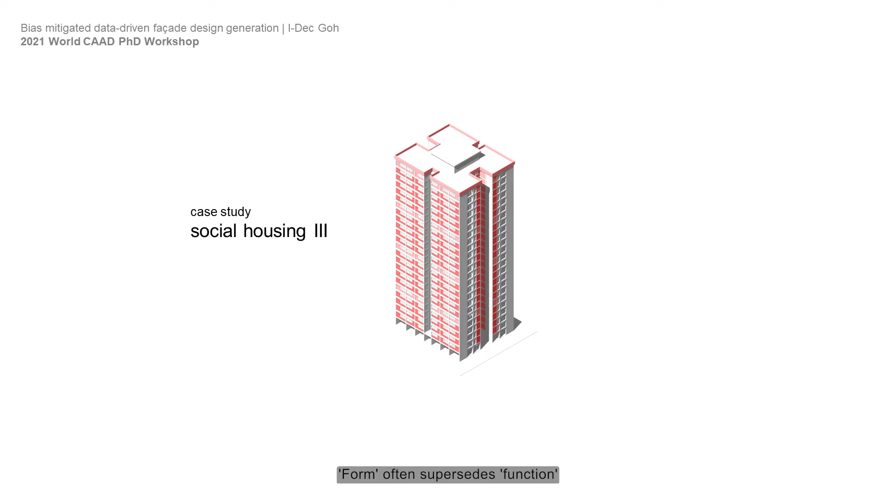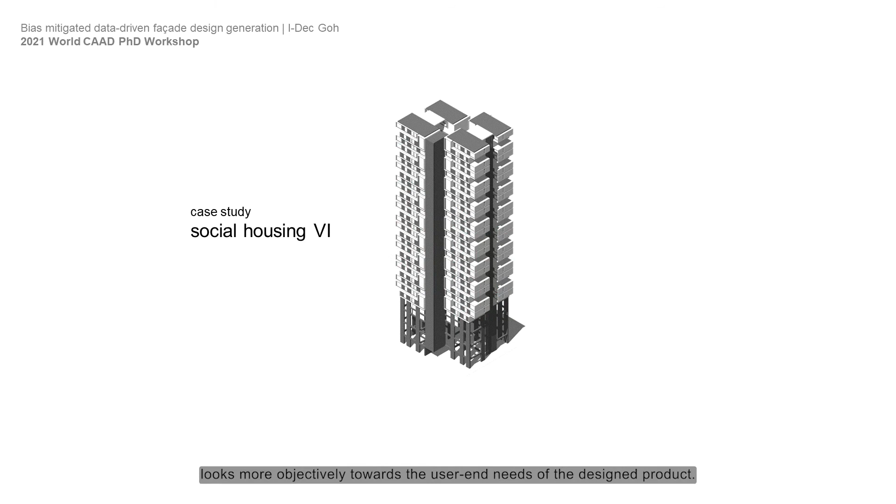Even in present architecture, the age-old theoretical argument of form and function is hard to avoid. Form often supersedes function to enhance marketability in architectural design. Form is closely linked to subjectivity based on producer outset bias, while function looks more objectively towards the user-end needs of the designed product.

Unfortunately, this oversight of producer-user design hierarchy in high-rise housing is evident in Singapore. The design preference in a building's form to its functionality is apparent in existing social housings that adopt architectural styles unsuitable for warm and humid climates. Hence, the functional solar needs of the occupants are often not well considered when prioritizing aesthetics, such as the abundant use of facade glass as opposed to heat-preventive materials.

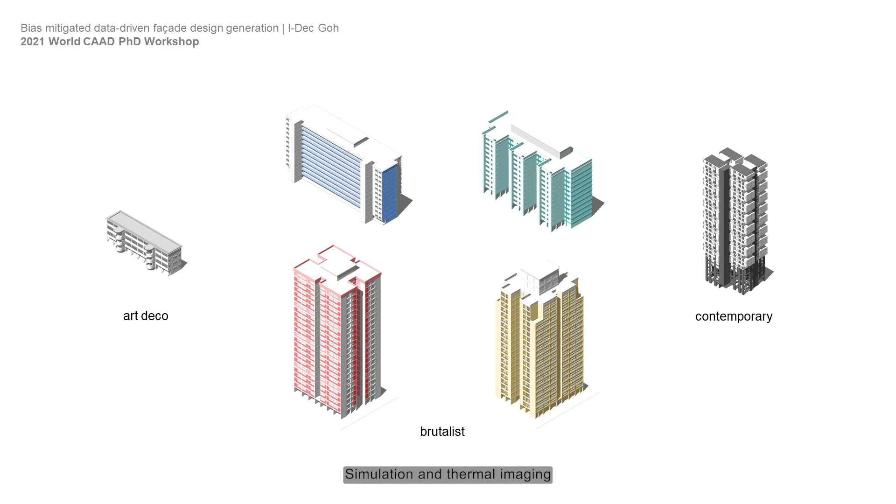Simulation and thermal imaging will be taken from 6 existing social housings in Singapore, selected based on 3 prominent architectural styles since its development in the 1960s. These are Art Deco, Brutalist, and Contemporary.

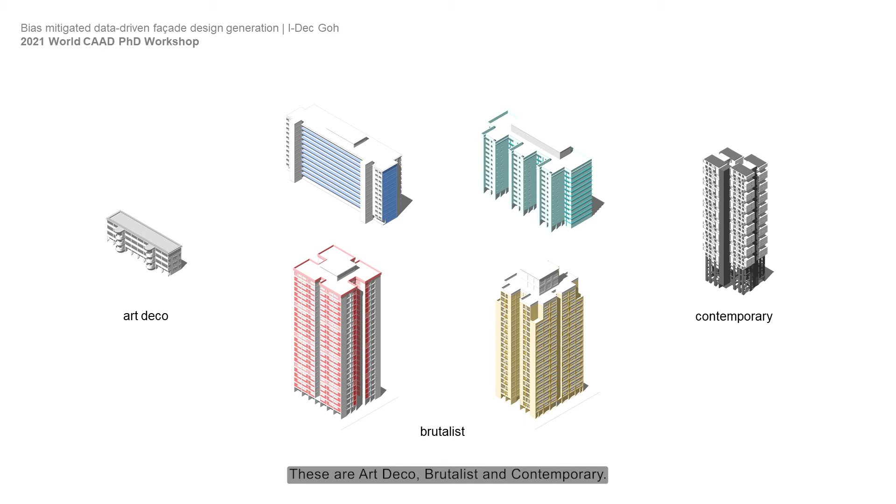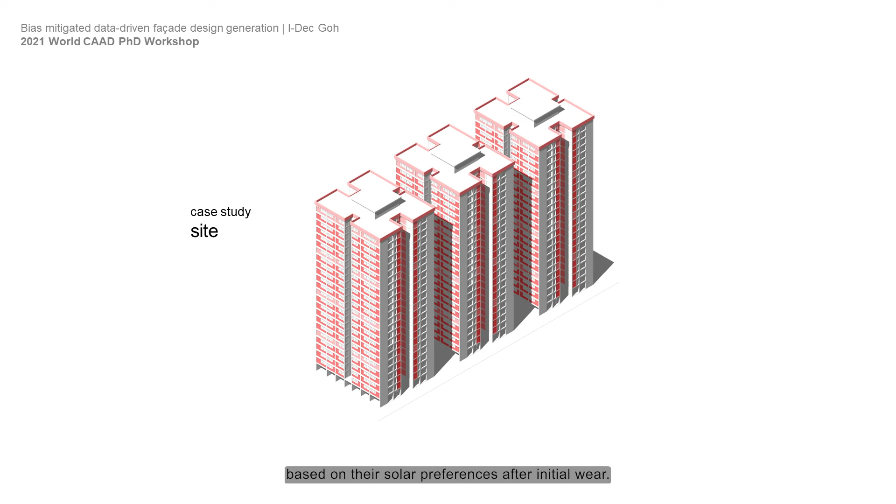Analysis of chronologically maturing buildings will account for design aesthetic and stylistic changes over 2 decades and occupants' interventions based on their solar preferences after initial wear.

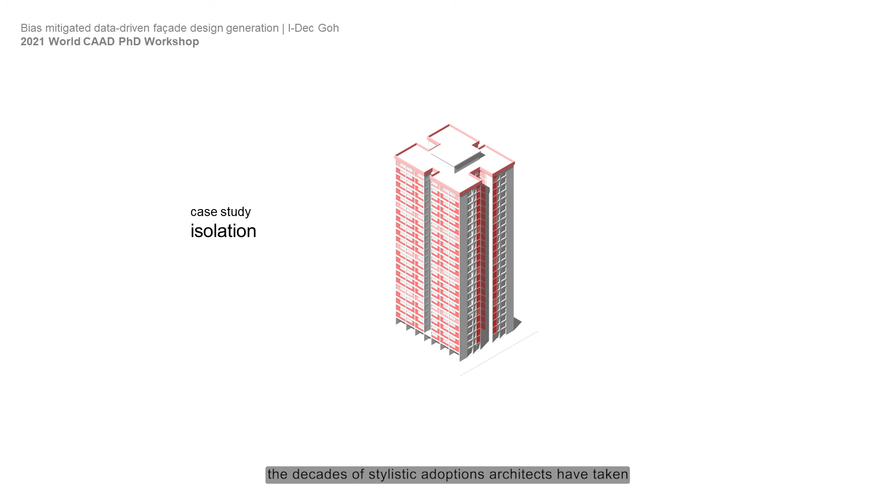Finally, conducting case studies of different architectural styles considers the decades of stylistic adoptions architects have taken to social housings in Singapore. Each building will be studied against the island's general climatic conditions over 3 months to collect incident solar radiation data over monsoon and non-monsoon seasons, accounting for changes in the occupant's use.

Data collected will be used to teach rule-based machine intelligence to generate objective prioritized facade designs. The aim is to establish a synergistic and sustainability prioritized approach of intersecting objective design and subjective aesthetics in social housings in Singapore.

The selection of thermal imaging for data collection is an alternative to surveying households considering the current world crisis. It also favors an objective collection of post-occupancy information that mitigates bias that may arise between surveyor and occupant surveyed.